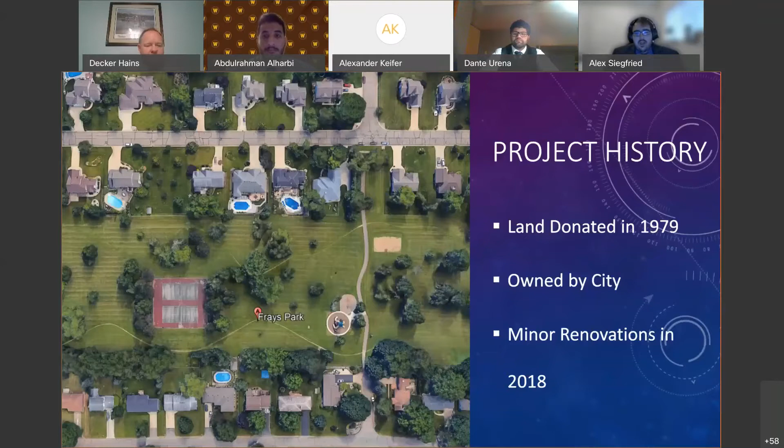The two big constraints we ran into for this park were, firstly, that any tree removal requires approval by the city tree committee. And to get this approval, you have to have a legitimate reason for wanting the tree removed, such as disease. You can't just want it gone because it's in your way.

When we visited the park last spring, we saw that a lot of trees had already been marked for removal. When we came back in September, these trees had been removed, and we didn't think there were really any we could legitimately remove. That was one of the factors that guided our decision making as to where things would be placed around the park.

Secondly, our budget was only $500,000, and this is further restricted by the fact that the city of Portage still uses prevailing wages, despite the state of Michigan ceasing this practice in 2018. That means there was going to be additional labor cost to factor in against that budget, which means there were a few ideas we had that we couldn't really explore.

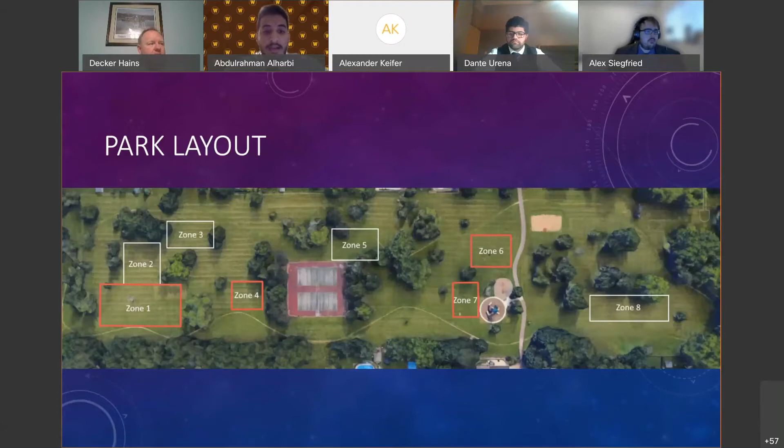The idea that we came up with, which makes the park special in the design, is to make it an easy, accessible facility and closer from each other for people who want to use the sports fields or pavilion, or even the parents who want to watch their children playing in the playground area.

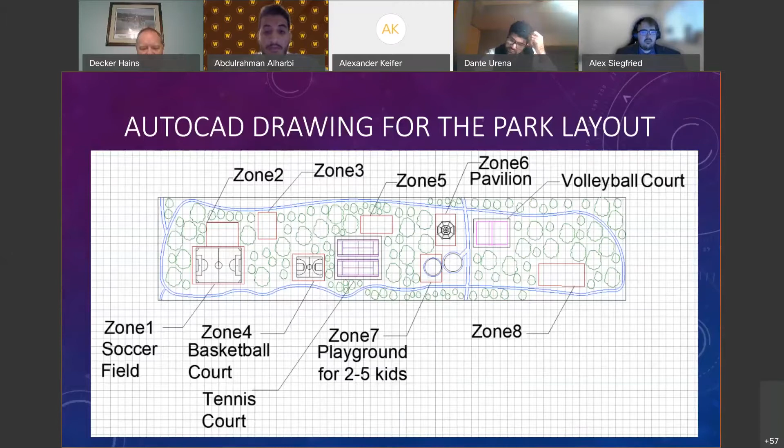Zone 1 was selected to be a soccer field because it's the second largest zone in the park, at 16,000 square feet. Additionally, the zone is already flattened ground, which means we only need grass trimming in preparation for its use.

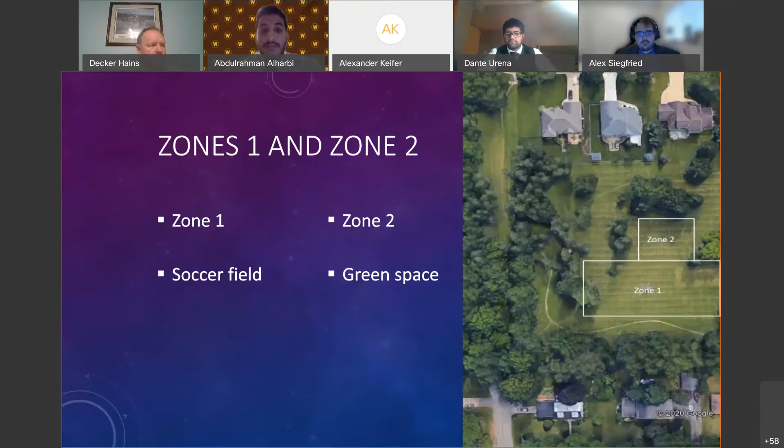This is one of the common requests that was brought up from community members. Due to the empty space of that area from trees, and some community members coming to play soccer in that green space, we found it a sufficient place to install a soccer field.

The soccer field dimensions are 160 feet by 100 feet, which is very suitable for Zone 1, and the field doesn't need any soil work because the ground surface is flat and ready to use.

The soccer field needs equipment like any other sport, which is the soccer goal. We found a very good choice: a movable goal made of aluminum with the best size for kids to use, which is 8 by 24 feet. The design for the field is meant for kids around 9 years old, more likely not a professional soccer field for professional use. Next slide, please.

One of the requests that came up from a community member in that area was to include a basketball court. The idea was brought up in city meetings, and we decided to install a 3/4 size basketball court with 3 basketball rims to provide a place for anyone to play. Zone 4 is located next to the current tennis court and surrounded on the eastern side by trees.

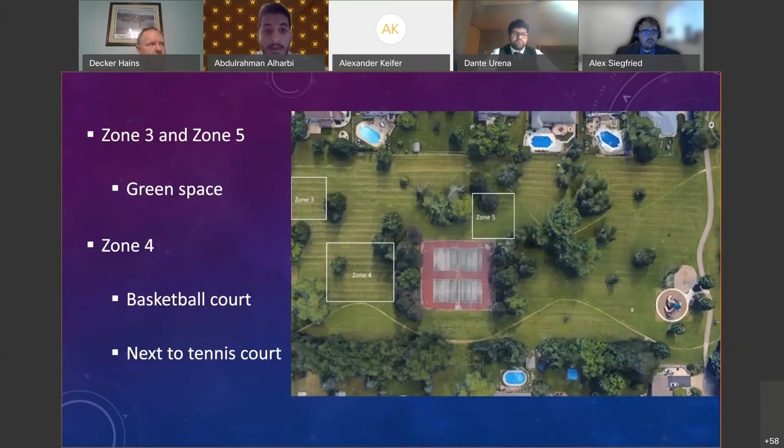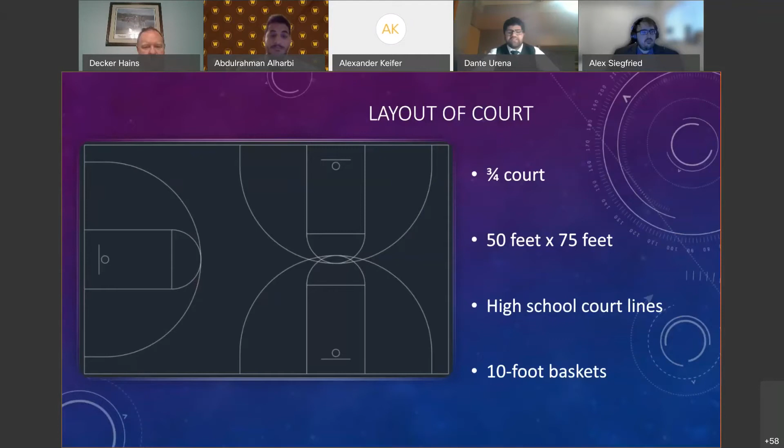Thank you, Abdul. So kind of with what Abdul was saying, the main focus on why we decided on the 3/4 basketball court was a request from community members to limit the noise levels. They didn't want that to increase, as well as any headlights that would come in late at night in the park. So we came up with this design that was 50 by 75 feet. It would have high school court lines painted and marked, with standard typical 10-foot baskets.

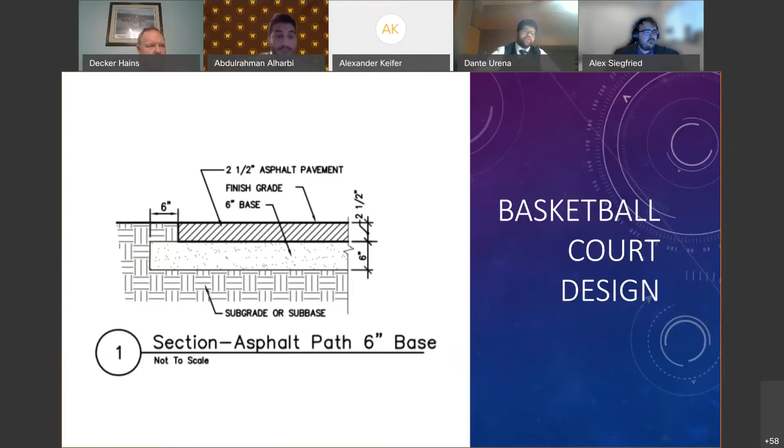For the actual basketball court, we have here a cross section of our asphalt top. With that, we got our calculations: excavation calculations, a 6-inch subgrade of class 2 sand, 4-inch subbase of 21 AA crushed concrete, and 2.5 inches of asphalt pavement. We will get into each of these here.

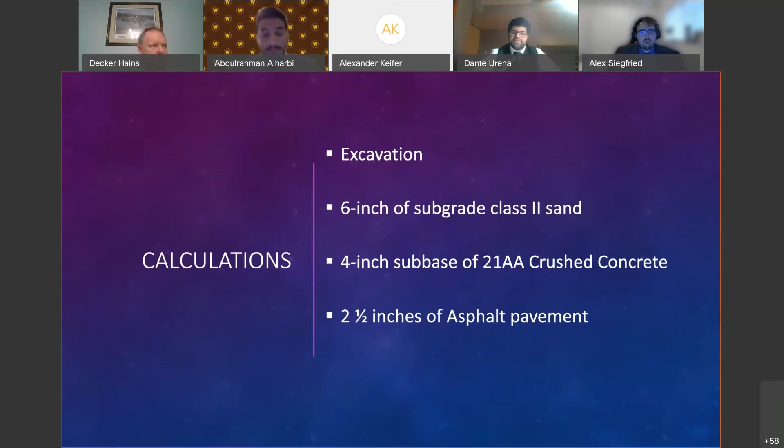By using Google Earth, which was the best method we had due to the circumstances, we found that the elevations in this particular zone 4 varied from 940 feet all the way up to an elevation of 960 feet, which is about a 20-foot difference.

So what we ended up doing is we broke it up into 4 equal sections with corresponding elevations, and we took the areas of each of these sections to correspond to the excavation down to the 939 feet elevation, which we needed 1 foot below the lowest point.

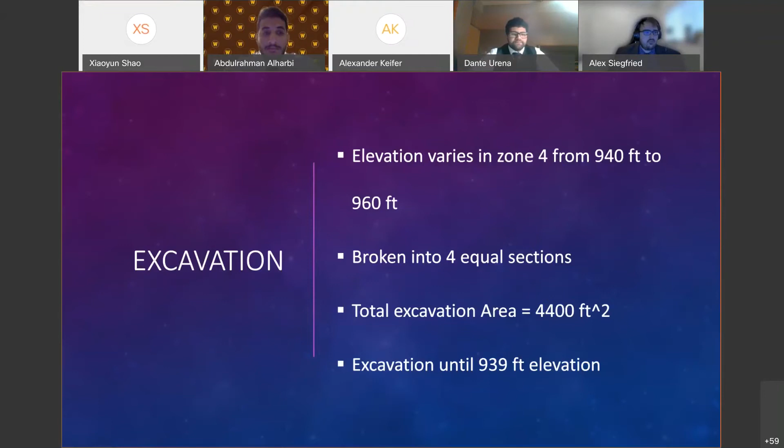This shows our calculations to get these quantities. Our area was 80 by 55 feet, because our basketball court was 75 by 50 feet, and this gives workability space. As mentioned, we broke it up into 4 groups, and with all these sections added up, we came up with 1,865 cubic yards for total excavation for the basketball court.

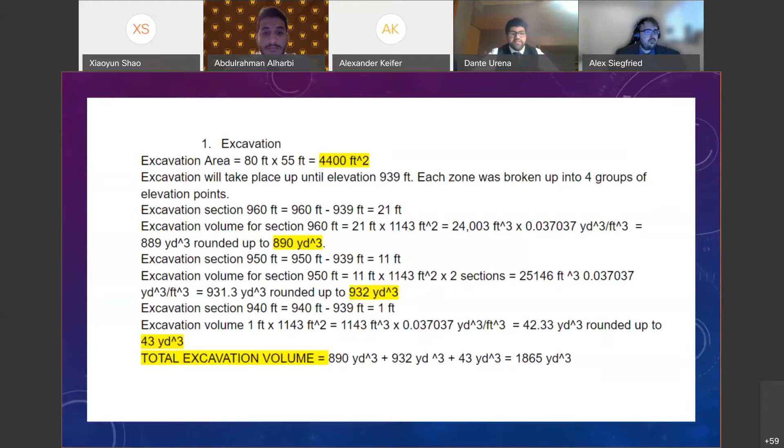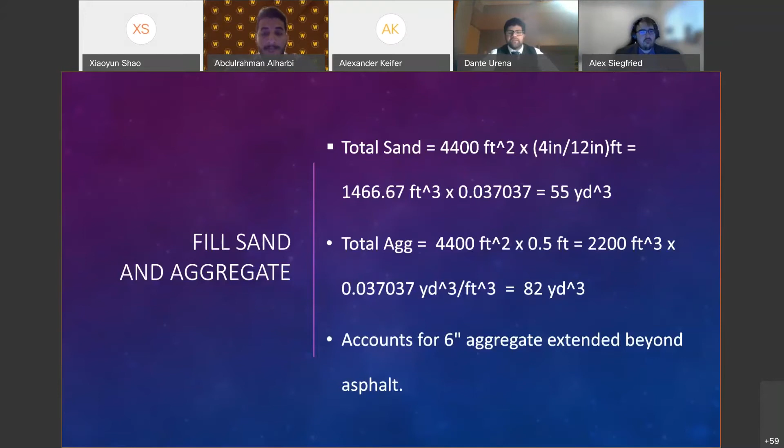For the total fill, we're using class 2 fill sand for our subbase. We chose 4 inches, then 6 inches of 21 AA crushed concrete, which is optimal for this design, and 2.5 inches of asphalt pavement on top, which is also typical and standard for an outdoor basketball court. That would be sufficient.

Zone 6, 7, and 8. Zone 6 was chosen for the pavilion because of its close proximity to the entrances. As you see in the figure, they have already paved a path right there, making easy access for all the park goers. This is where most of the park volume would be too.

Zone 7 was chosen, and there's a figure of the pavilion. Zone 7 was chosen for the playground for ages 2 to 5, as mentioned before, and this was placed close to the pavilion so parents and guardians can keep a close eye on their kids. It makes the most sense to have all the playground equipment next to each other in the park.

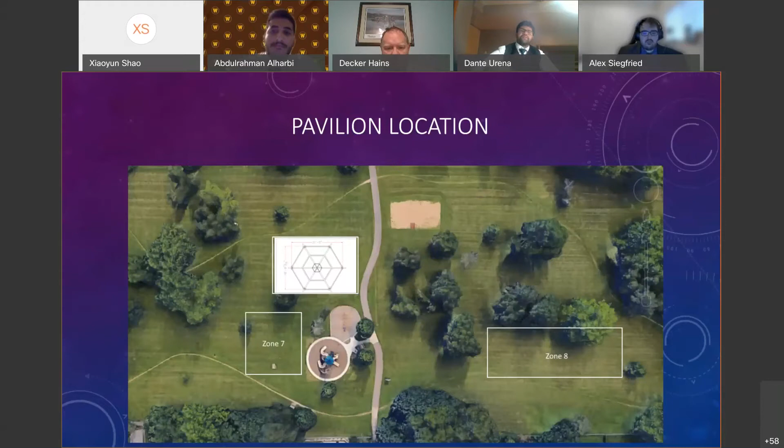Zone 8, we decided to leave as green space. This was the extended section of the park, towards the end where not a lot of people go. We thought it was best to just leave it like that, for future additions or other ideas.

Here we have a picture of our pavilion design that we came up with from Icon. Our longest section is 21 feet 5 inches, and our shortest section is 18 feet 9 and 11/16 inches, and that's just how the geometry ended up working out. We have a unique hexagonal shape that we chose to give the park a unique look and touch. Could you go back to the previous one?

As mentioned before, this is something we discussed with Icon, and to be clear, this is their drawing, their CX25-9TM-P5.

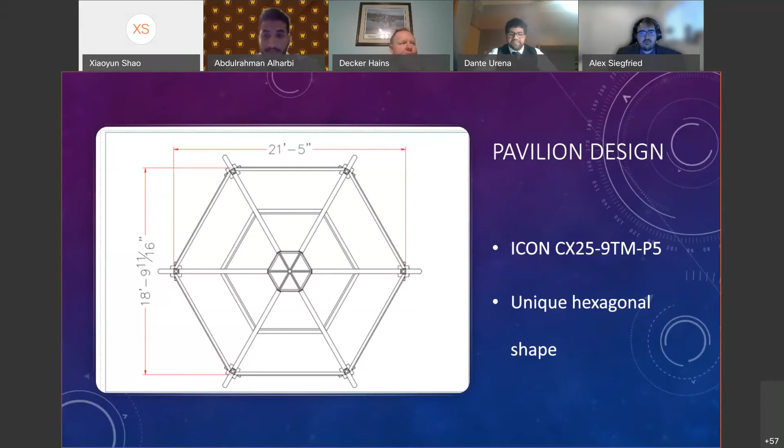For the pavilion design, the columns are made of A500 grade B steel, HSS 3.5 by 3.5 by 1/8. Our columns are spaced out evenly at 60-degree angles, and this is sufficient to allow for the most space for the columns given our hexagonal shape.

Our plates are made out of A36 steel. We have an open cupola at the top of the structure, allowing for the maximum amount of sunlight as well as serving a beautification purpose. This is also an optimal design that we thought would be best suited for this park - it's very spacious for seating and encourages natural light.

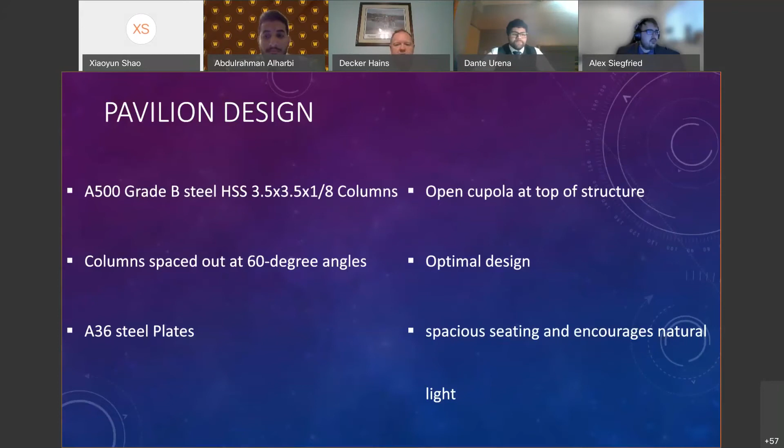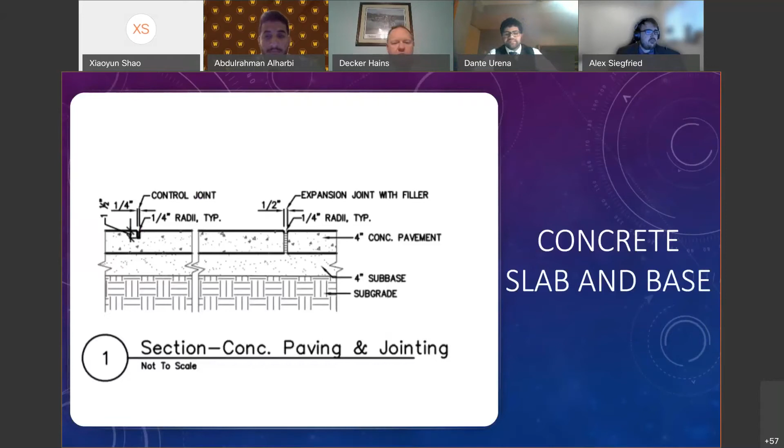This consists of 4 inches of standard concrete pavement, 4 inches underneath of 21 AA crushed concrete, and, pretty similar to our basketball court, 4 inches of class 2 filled sand.

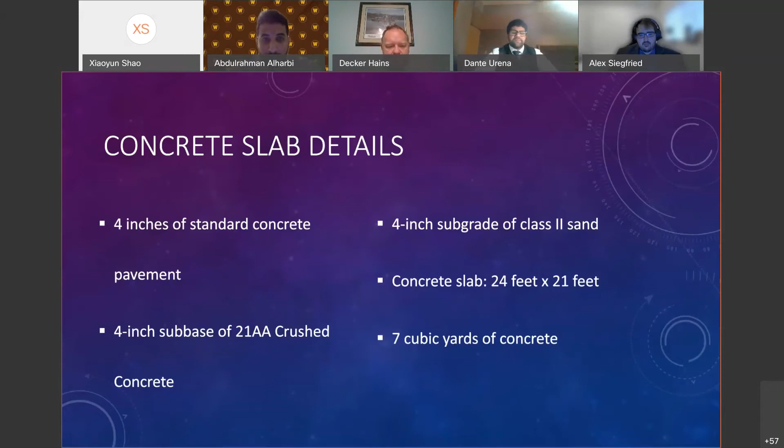Our concrete slab was 24 feet by 21 feet. These dimensions we got using the 2-foot rule clearance of the ends of our pavilions. This is to allow water to fall right on top of the concrete slab so it doesn't create a crater around the slab. With our calculations, we were able to come up with 7 cubic yards of concrete after rounding up.

Our playground equipment is rated for ages 2 to 5 years. This is to complement the existing equipment, which is rated for ages 5 to 12 years, with the location being next to the existing playground equipment.

It will allow guardians to keep an eye on all kids in their care, both ones using the existing equipment as well as ones using the new equipment, as both will be located in sight lines of the pavilion. Guardians will not be too far away at any given time. The equipment will also be located far enough back from the walking path to ensure child safety from pedestrians and bikers on the path.

The bond and play is a bonded rubber surface. The rubber is made of recycled tire rubber. We looked at that for sustainability, but it was too expensive to work into the budget.

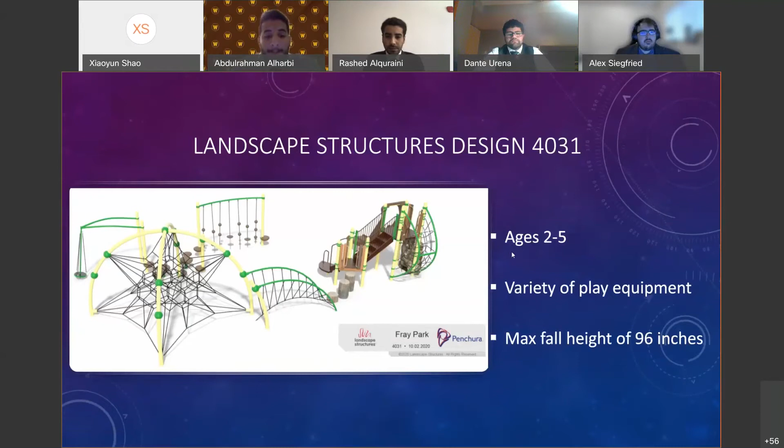As a result, we're going to be adding signs to the northeast entrance, northwest entrance, southeast entrance, and southwest entrance to help increase visibility of the park. These are the 4 official entrances to the park. Obviously some people, especially towards the south end, like to come in from their yard, but these are the 4 main entrances.

This is our construction schedule. Using Microsoft Project's auto schedule function, we calculated a schedule of 19 working days. We felt this was reasonable based on our collective industry knowledge.

It's important to note that this is a hypothetical schedule for the project because the city manages so many parks. They try to spread what funding they have available year to year around all parts of the city. So it's unlikely that the city will actually implement this design next year, but we still felt it would be a good idea to include a schedule as a baseline for the city to work with, which they can adjust based on contractor availability and how aggressive they may want to get with actually implementing the design.

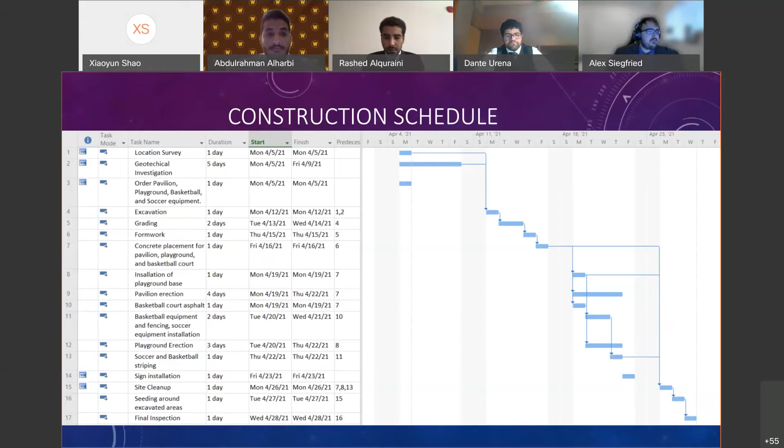Our project is restricted by the City of Kalamazoo Parks Department to a budget of $500,000, but we came up with a final cost for the project of $447,000.

Here is a final cost estimate breakdown. The total cost was estimated as the bare cost of construction, evaluated by the material cost associated with the labor cost for each zone. We also considered other additional costs, for example, the rental equipment cost and contractor profit.

The estimated final cost for the picnic pavilion in Zone 6 is $93,000, while the final cost for the playground equipment in Zone 7 was estimated to be $125,000.

The final estimated cost also includes the signage and entrances cost, estimated at $4,000, as well as the basketball court and soccer field, estimated for both fields to be $200,000. This includes the material for pavement for the basketball court and the equipment needed for each field, plus the labor cost.

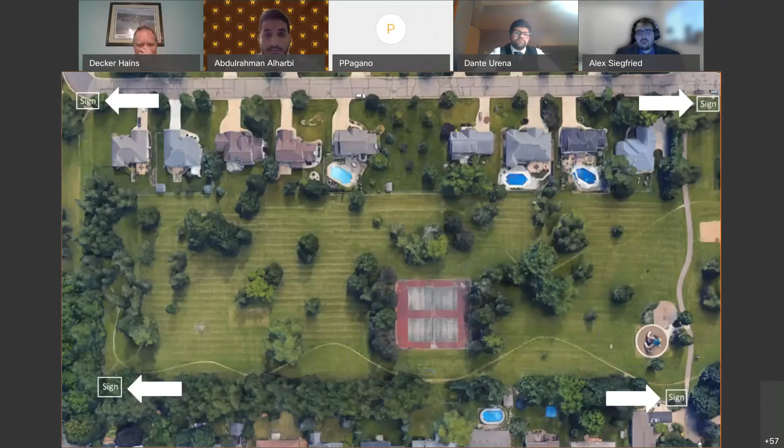Hey, this is Paul Pagano. I know you guys had a very strict budget for this one. Did you guys include any contingency, or is there any design or construction oversight fees that you had to include in your bid?